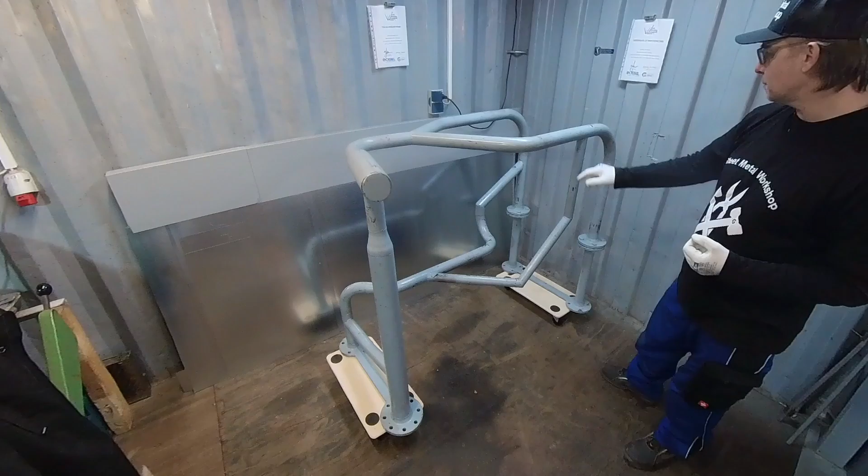Okay, first what I do when I come somewhere on the site is analyze what kind of job it is. So we have here pipe work, and I already see two boxes with different dimensions of pipes. It all depends on how much experience you have with measurements. I, for example, can immediately recognize the pipe - this is a 2-inch pipe, there's a 1.5-inch pipe, and here we have a bigger one, a 3-inch pipe. But if you don't have experience, there are tools you can carry with you, like this one.

If I want to know for a 3-inch pipe how much the outside diameter is, I just catch the diameter and read it - I see here, okay, it's almost 90 millimeters diameter outside. The same thing you can do. It's a good tool, you have to carry it with you. It all depends on the experience. That's one thing I recommend.

The other thing is, it's also not bad if there are a lot of angle pipes - this is a good tool for measurement to do with angles. So I have here this angle pipe, for example, and I can hold this exactly on the angle. See, now I can read here, and it says 45 degrees.

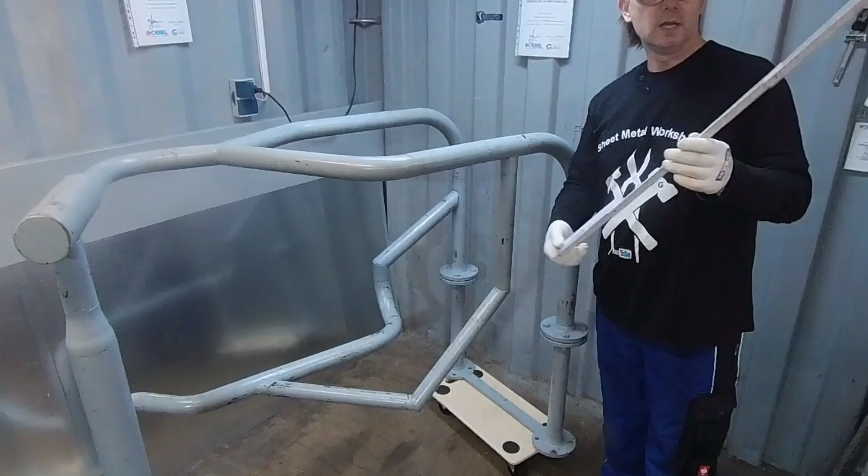Now there's also a helping tool. Of course, the more tools you use, the more you have to carry with you. It's not bad, you can put everything in a little bag and carry it with you. I use mostly, almost always, my ruler. So this is a ruler, and I can also measure the angle with my ruler.

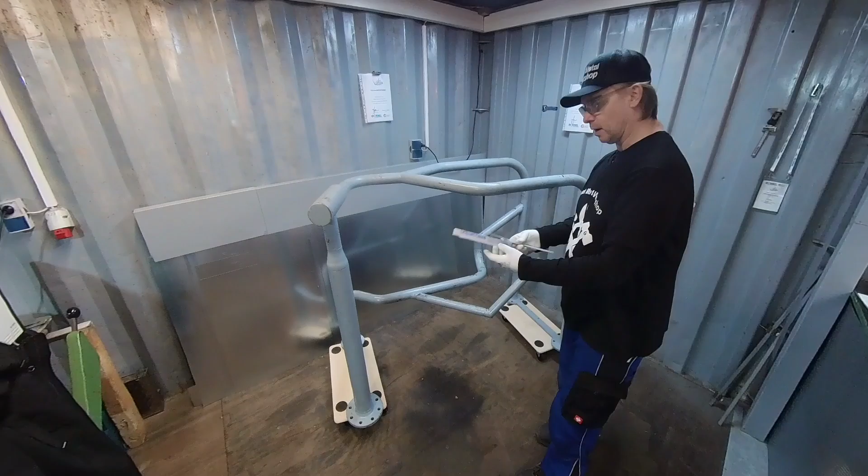Here I'm going to measure the same angle with my ruler, and I fold it, and it says here 766. Now I have a list, my ruler list - on one side I have my sizes from the ruler, and on the other side the degrees. So here we have 766, that means 45 degrees. What I do when I take measurements is always write down my ruler measurements, and later on look in the list to see how many degrees that angle is.

Okay, well, let's get started. So we are now analyzing this pipe rack. I can see we have 1, 2, 3, 4 pipes coming up, and then we have one pipe in between, and also down here one pipe in between. Now I'm not going to measure everything in detail - I mean, I will do it, but not on video, it would take too much time. I think the best way is I'm going to measure this part in detail to show how I will do it.

Maybe once I'm gonna measure it normal by hand and draw it on paper as a sketch, a normal isometric drawn by hand with my drawing template. The other version is the digital version, but we'll come back to that measurement later.

Okay, well, let's have a start. We start now measuring, and I hope you will enjoy the video. Of course, there are many measurement guys, everybody has their own experience, so there could be other versions of measurements - maybe someone's got something better or easier. I don't know, I'm going to do it the way I would do it, but everybody is welcome to put their meaning in the comments. Every comment is welcome. Okay, well, let's get started.

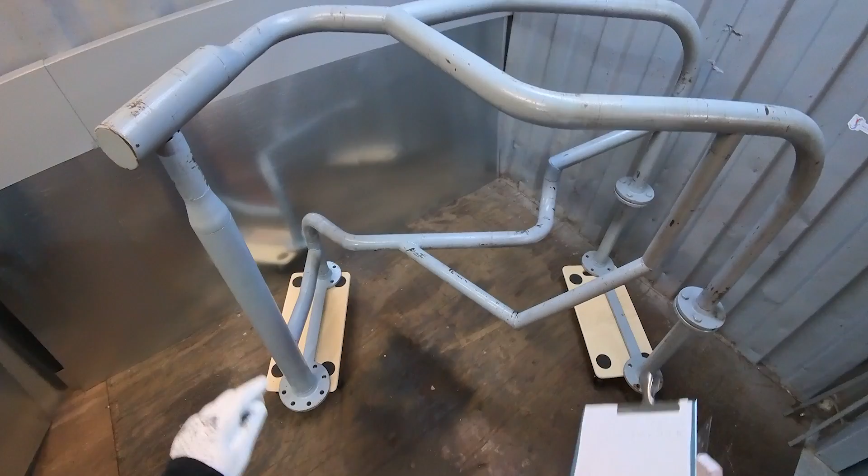Okay, now I'm standing here in front of the pipe rack, and this will actually be my view side - from this side is where I'm starting to measure it. It all depends on the situation on site. Maybe it's also possible I'm standing at the other side of the pipe rack and I measure it there - maybe I will see it differently. But in this situation, I'm going to measure it from this side.

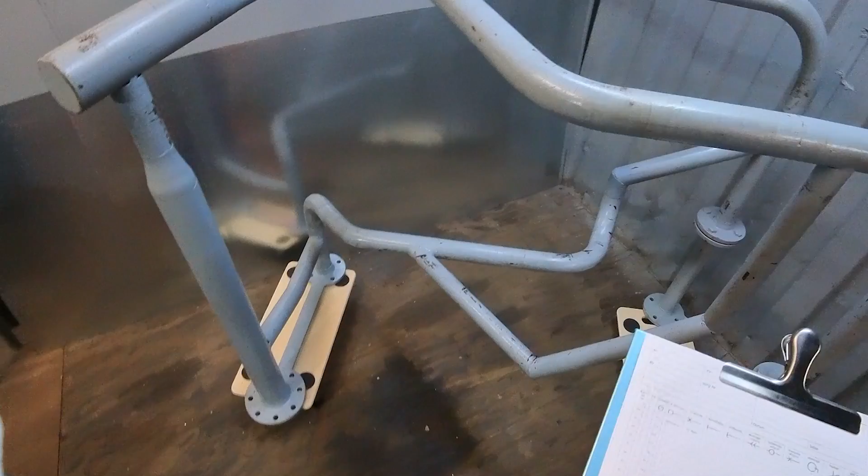So this is my front view, and it's always good when you put pipes with segments that you don't look into the swages, and if possible, also when we have this band, that we put the screws from this side if I'm looking at it.

So at the end, when the cladding is on it, you cannot see the seams or the screws.

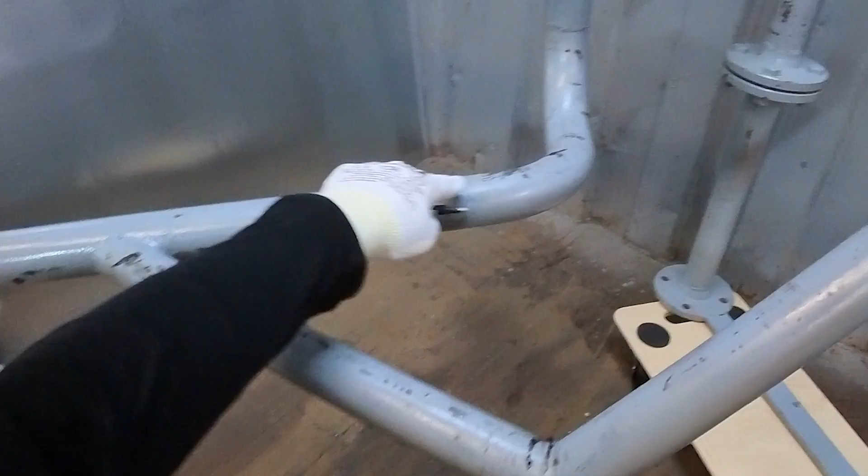Now next thing, I'm going to give those pipes position numbers. I've decided to make each position differently - I think it's easier. So when this is here, pipe number 1, for example, this would be number 2 position, here up until here. I will make this position number 3. Then we have this one, maybe position number 4. Then we've got that bend also until here, position number 5. And here this bend with the angle, position number 6. And then at the end, the Ypsilon T-pipe, I will make position number 7.

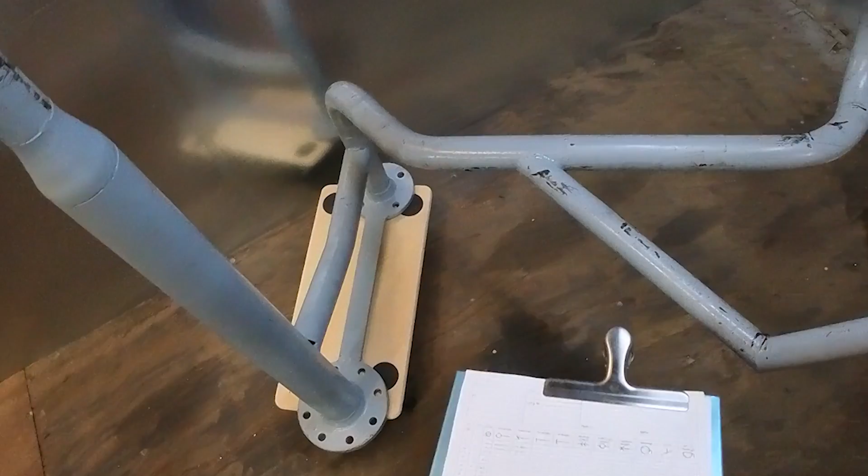But now for this example, I'm going to measure position number 1. Before I start, I know I'm going to write the pipe dimensions.

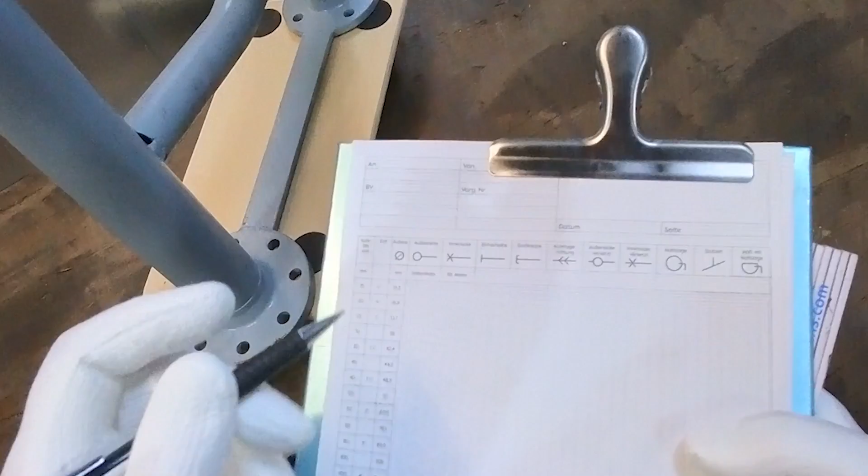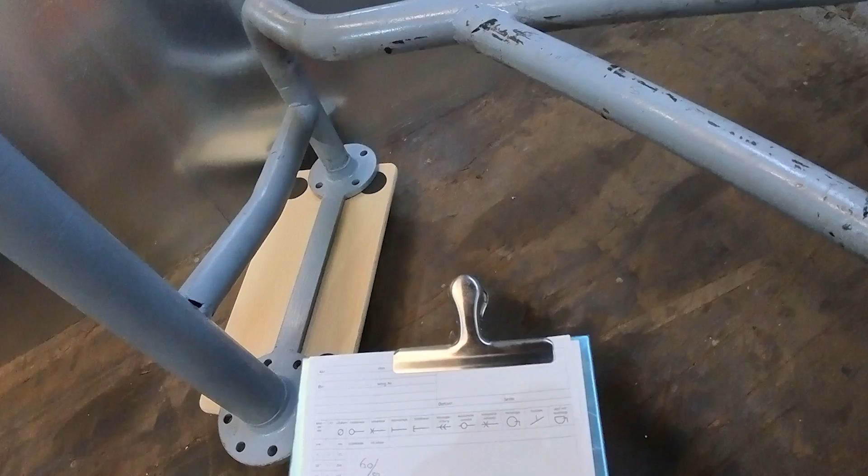So it's a 2-inch pipe, that means it's got an outside diameter of 60 millimeters, so I'm going to write here 60. And I know it's going to give 50 millimeter insulation, so that means 50 millimeter on this side and on the other side, that makes together 160 millimeter diameter. But from my experience, I think it's always better to make it a little bit bigger, so I give 10 millimeters more, so I'm going to make it diameter 170. That's the first information I write down.

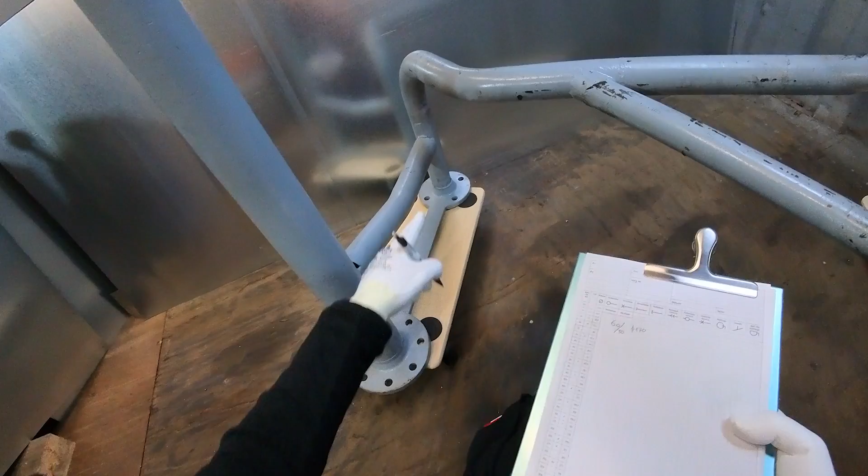Now next thing, I'm going to draw this pipe. So how it goes - it goes up, and I can already see it's a 90-degree bend. Then we have here also a bend that's got an angle, and then it goes straight, and here also a lying bend with an angle, and then we have a 90-degree bend, and we have here also an angled pipe with a T-pipe also angled with the same diameter. That is the stuff I analyzed.

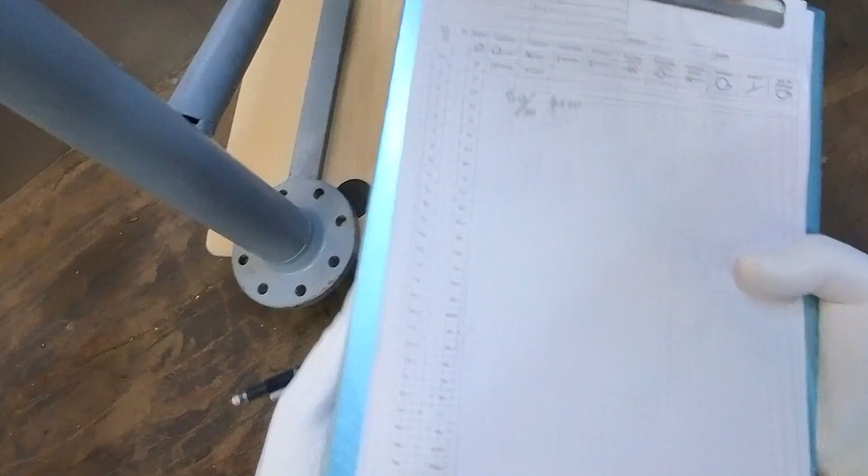So I'm going to start drawing. You can draw it directly with the drawing template I made a video about, or freehand. Mostly I do first freehand and later on I drag it over on an isometric or I put it digital. Okay, let's start.

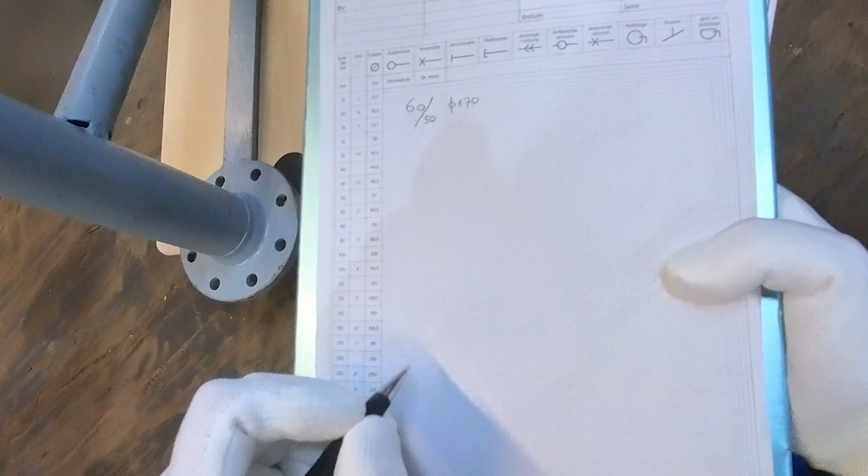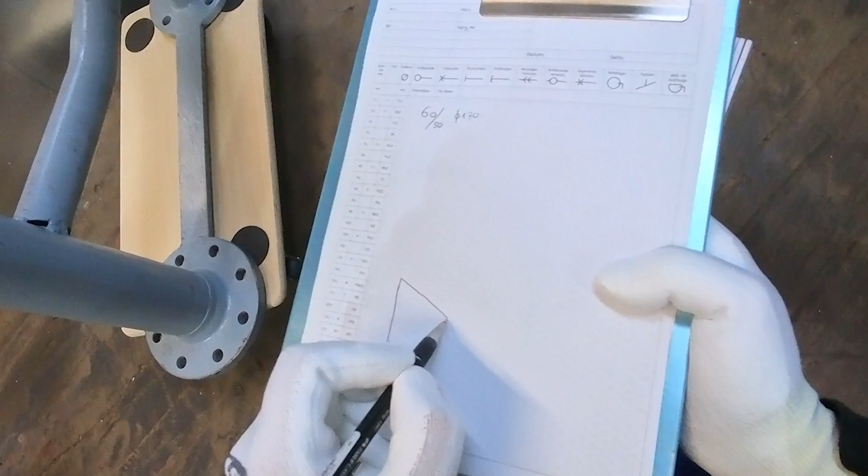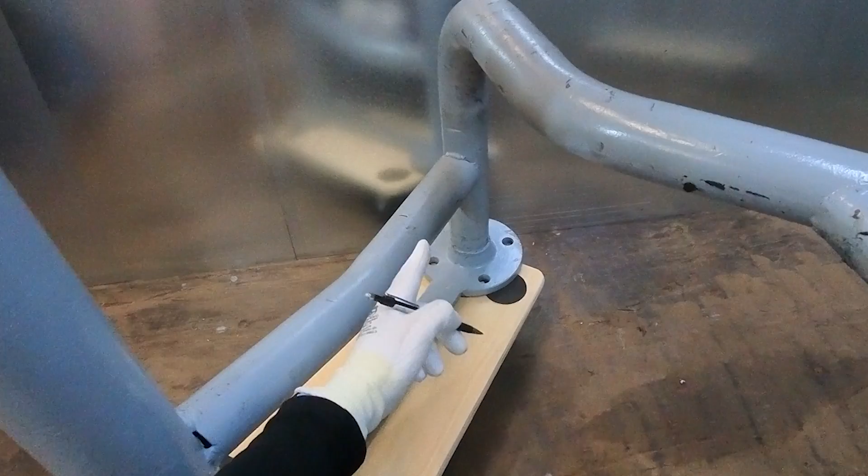So my pipe is now going here, goes up, and then it comes to the front, and then it goes to the side, and then again here, then it goes up, and then there's a T-pipe, and here it's another pipe, and this one goes a little bit like this. Here we also have got an angle. Here we do an end plate. Now we see here the T-pipe is coming in and the seam is also out of the center, and this one here also got an angle.

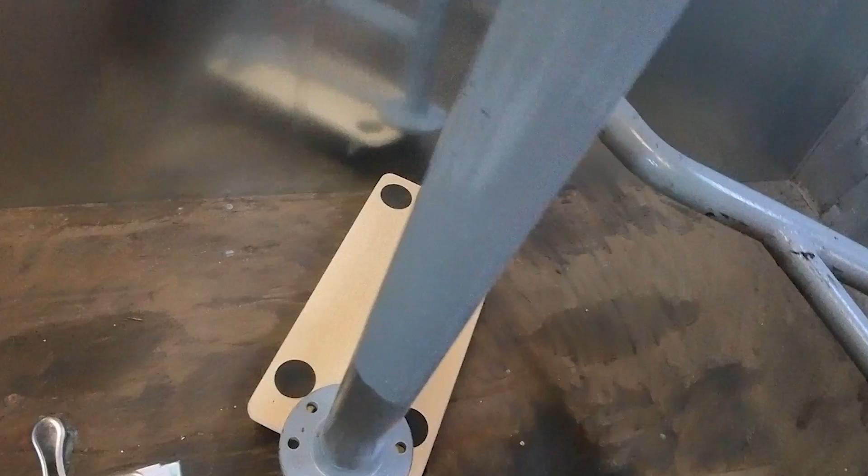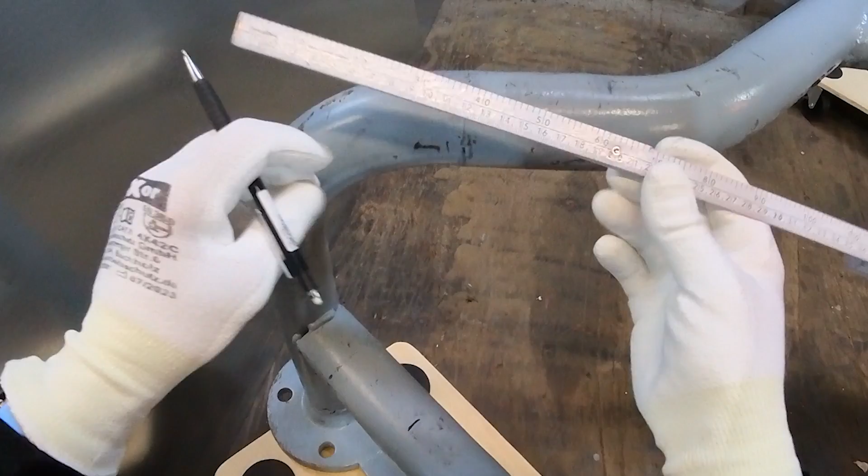So what we're going to do first, we're going to find out we need this length, and we need to know the radius. Here in this situation, you can see there's a seam, a welding seam. So if I hold my ruler on this welding seam and I go from this end to the center of the pipe - here's my center of the pipe - I will have here 130 millimeter. So my radius is 130. So I can give here R is 130.

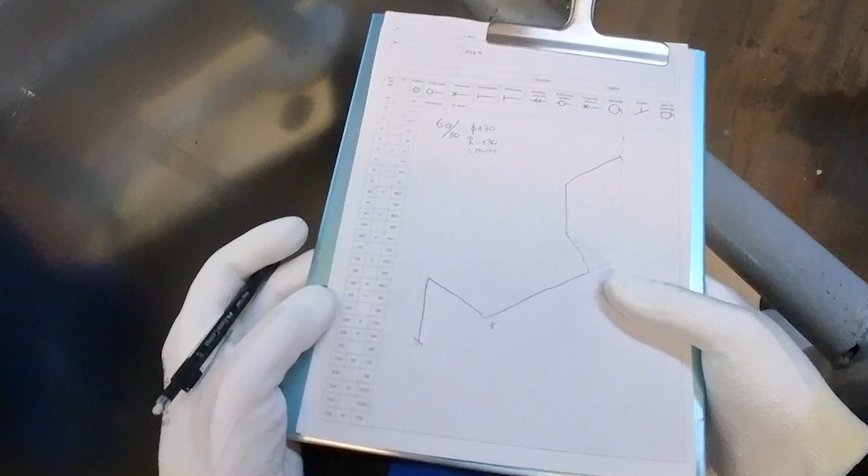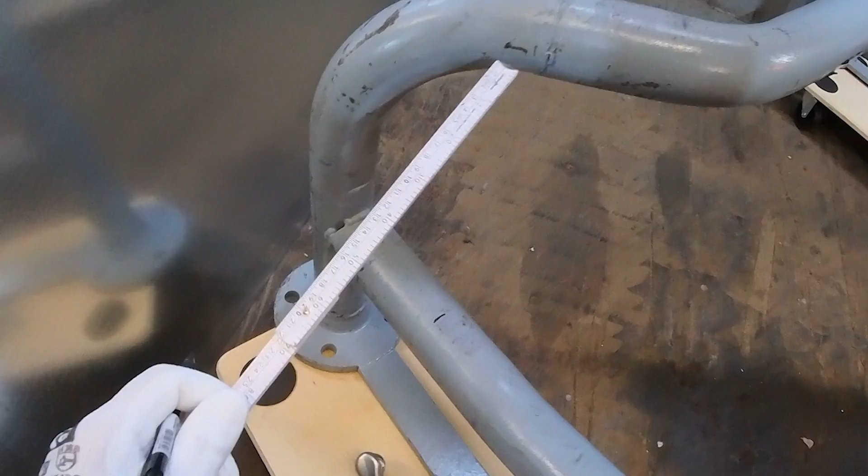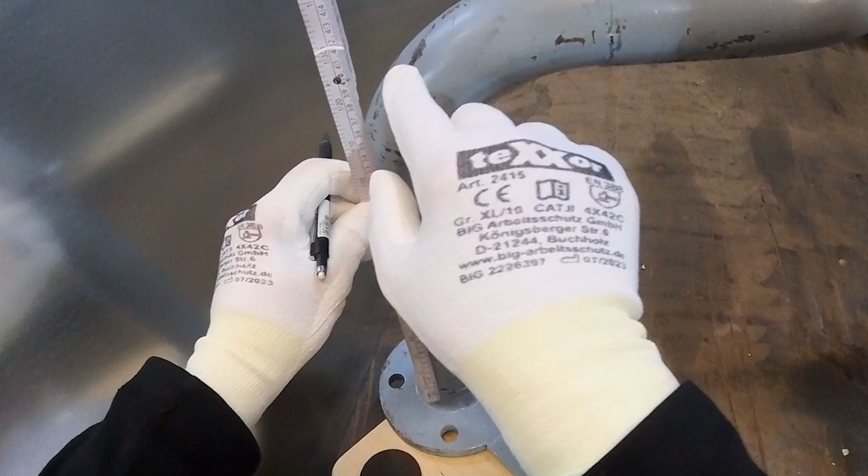And I'm going to give it a 3-segment bend, so 3 parts. So what I need now is this length, and I'm going to start here, give this length from here also down. There's a welding seam from here until the center of the pipe. So I'm going to hold my ruler here and look here - okay, here's the center. You have to imagine here a straight line. Sometimes you have to guess a little bit, but in this case, okay, 410. So that length is 410. I always measure from center till center.

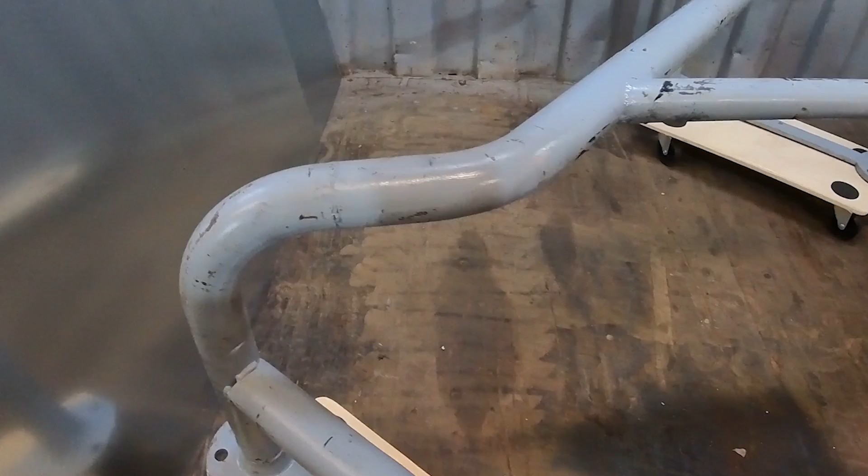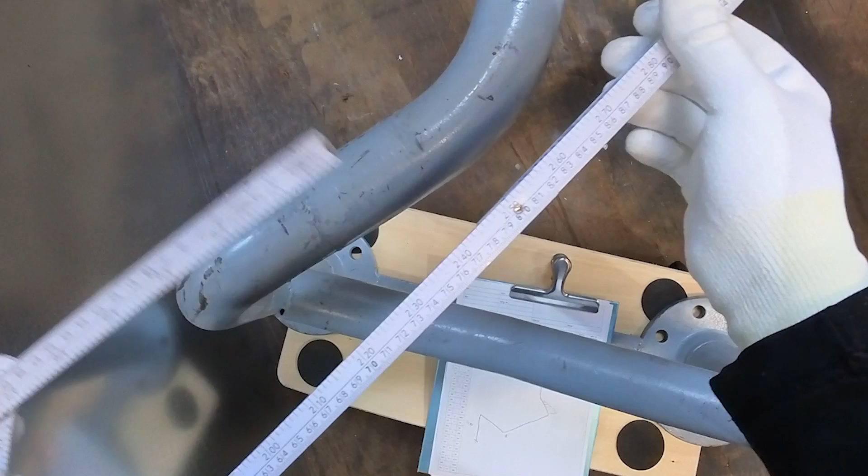Now I need the second length, from this center of the pipe until the center pipe of that angle here of the bend. So I'm going to put here my ruler and then look here. So I've put here my ruler, I have 769. Angle, 769. Okay.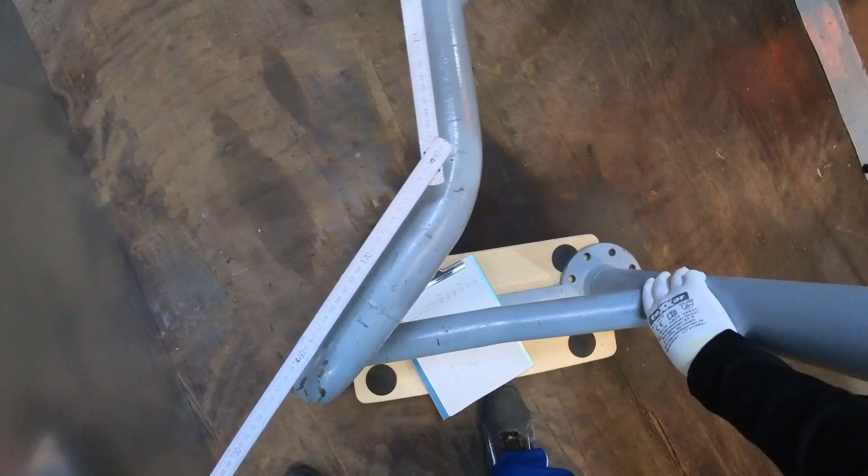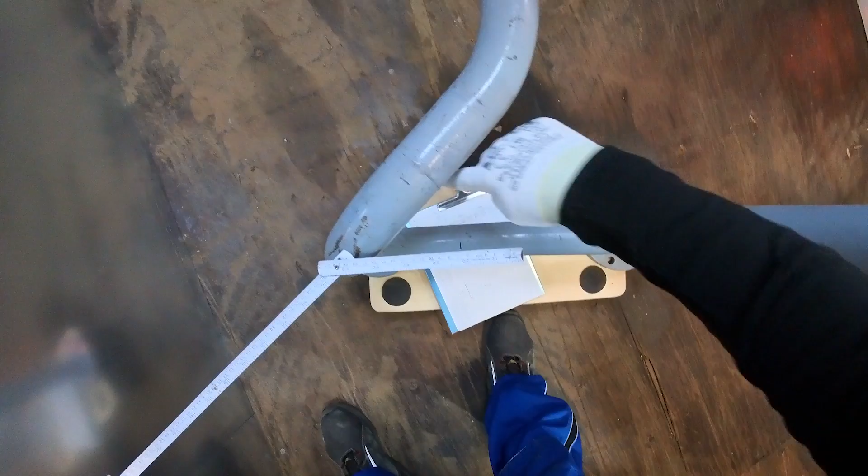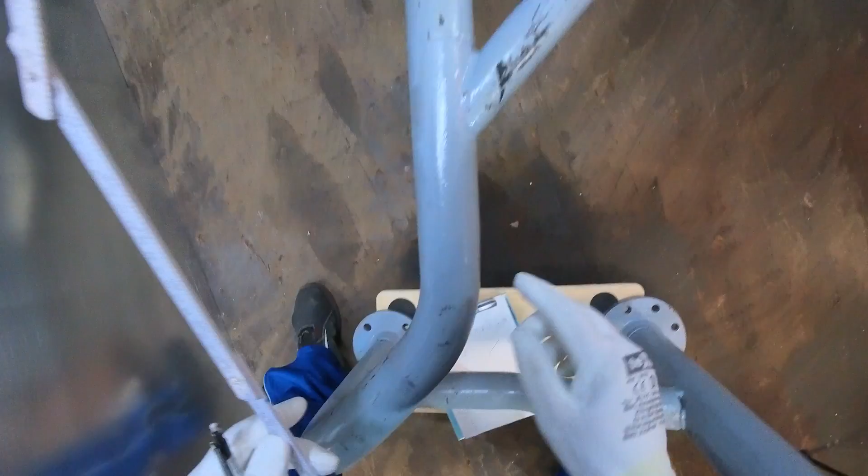Now here, for example, this angle - if you look here, this line from this line here, see, it's one line. So if I turn now this angle like this, and I go with this parallel line just here, okay, here, like this, it's still the one line, see? And if I look here, so it's symmetrical, that means this angle is also matched by this angle - it's the same angle. Okay, now while we're at the angle, you can also check here, and it looks pretty much like it's also the same angle, the same angle. Okay, it means - what I forgot - so if you put this here.

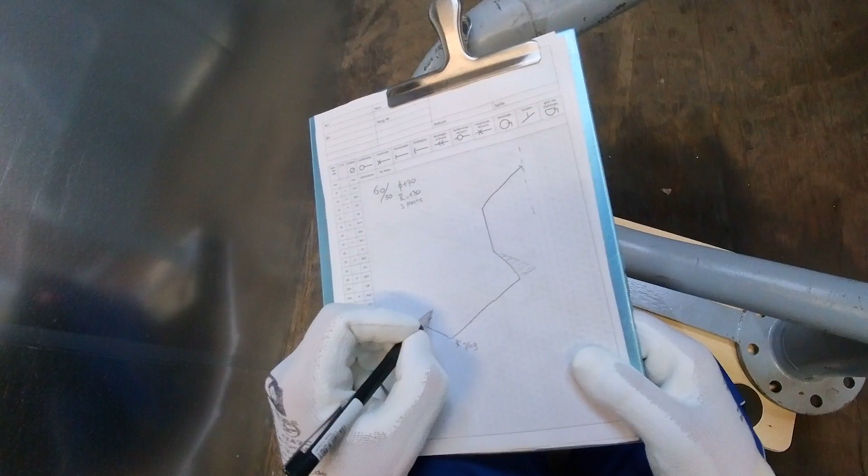This angle here, that means this point here, that's my center. So from this center point, I go to the center of this pipe here. Wait a minute. So I will say 260 millimeter. So that's 260. And I want to have here the seam, and here this seam is also 76.9.

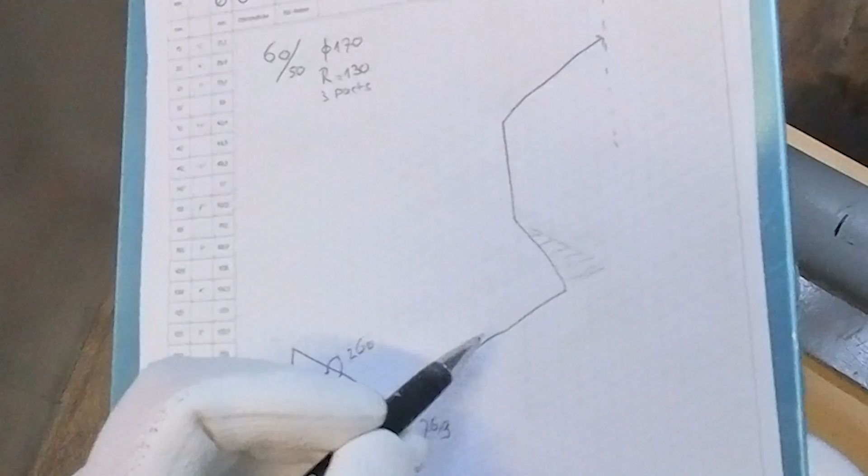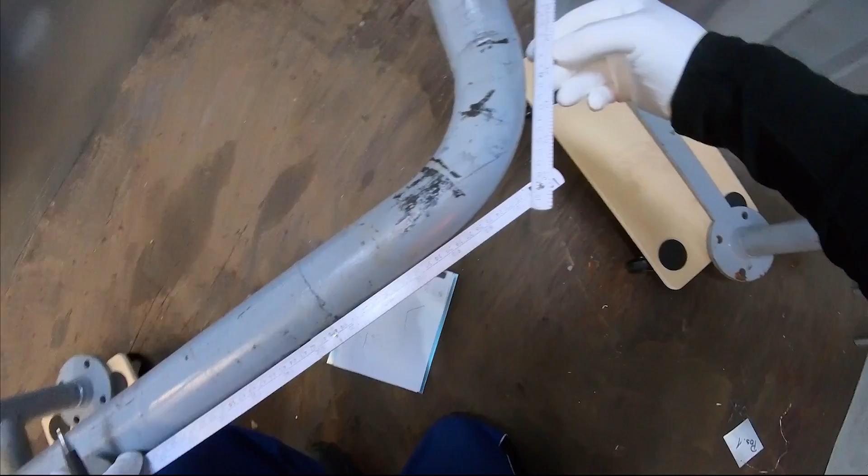Okay, then I have here the end piece, here piece. So I want to give here - we're going to measure it now. Therefore I need first this one, this angle. Can also measure it the same way. See, like this.

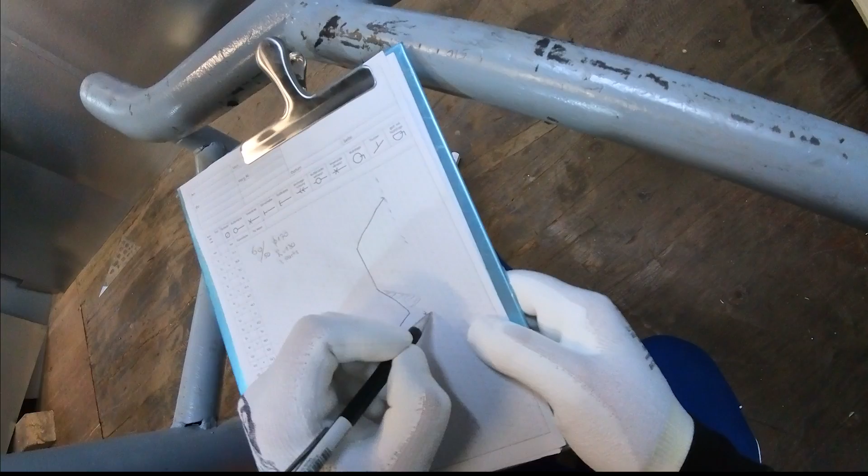And here I have also 76.9. So this angle is also known, 76.9.

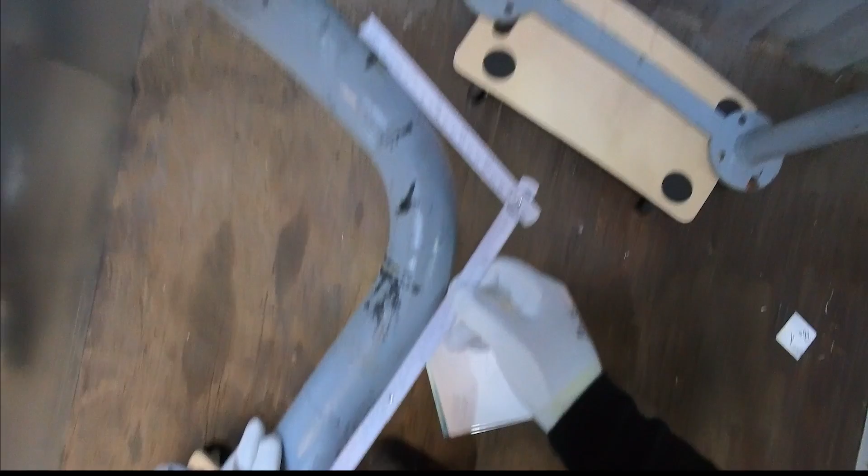And now same thing here. So I hold it again here. So this is here now my center line. So if I hold my pen here exactly in the center, it means here, that's my center point.

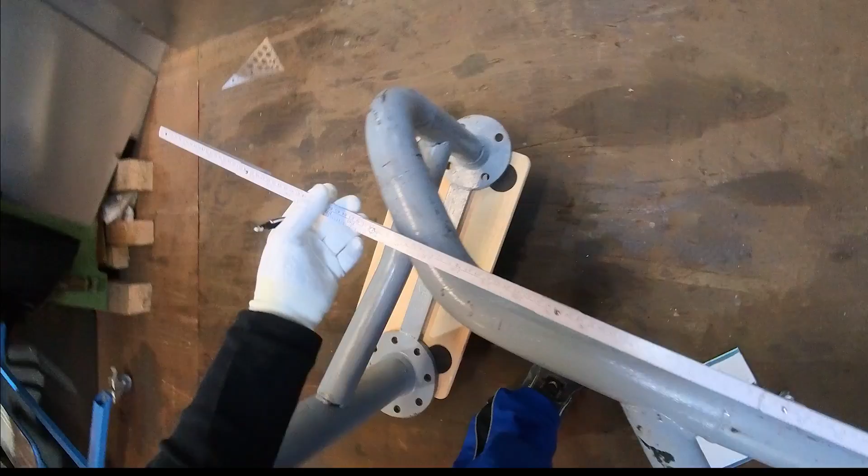And from that center point until this one, oh yeah, here we have 715 millimeter. 715. Okay, 715.

Now here's a T-pipe coming in, so it wouldn't be bad that I make here this bend until here, and then a piece of pipe here with the seam to the side, so it's easier maybe to fit. And then here the next piece starts with a bend.

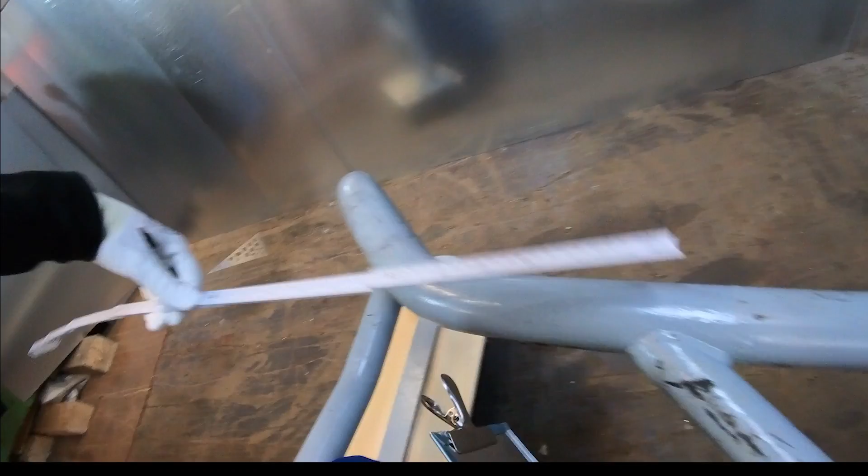So here I already did that before, so we have here a complete size from 715. And now we have from center here until center here, 230.

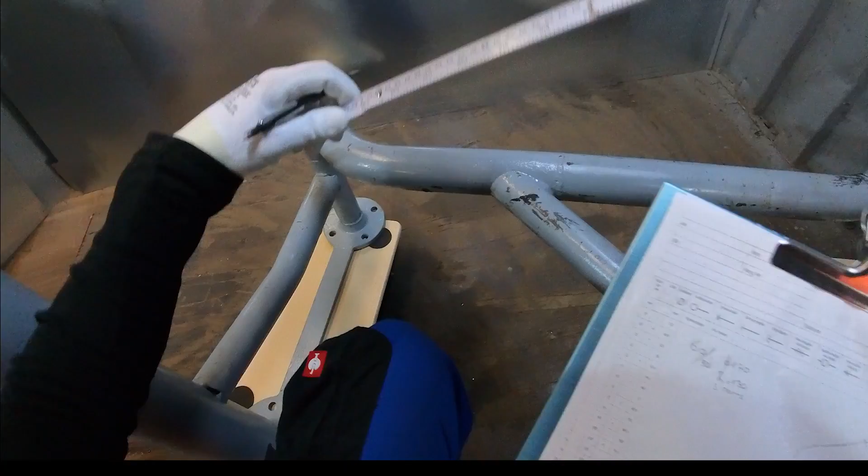So that's for the cutout, for example. 230, that's just, I notice, okay. So we give here, for example, 100. So here I have seam 100.

So 615 is left. 615 is left, so 100 plus, for example, we go here 500 until here. Okay, so I give here 400. And then automatically 500, so this is 215 left.

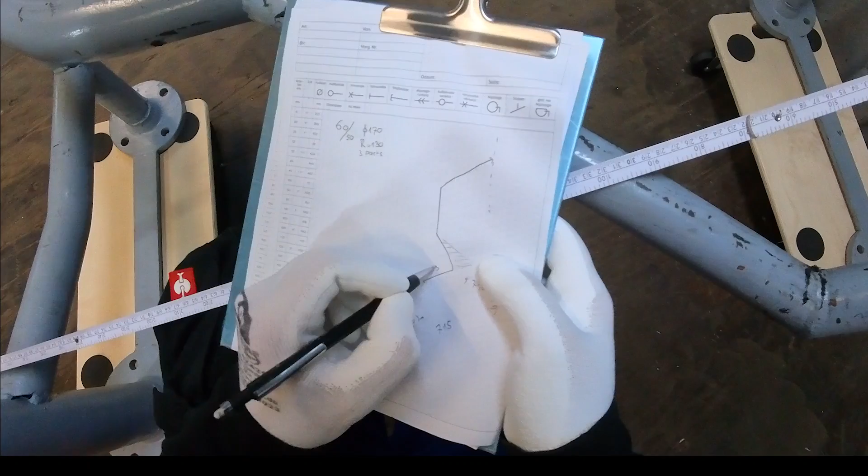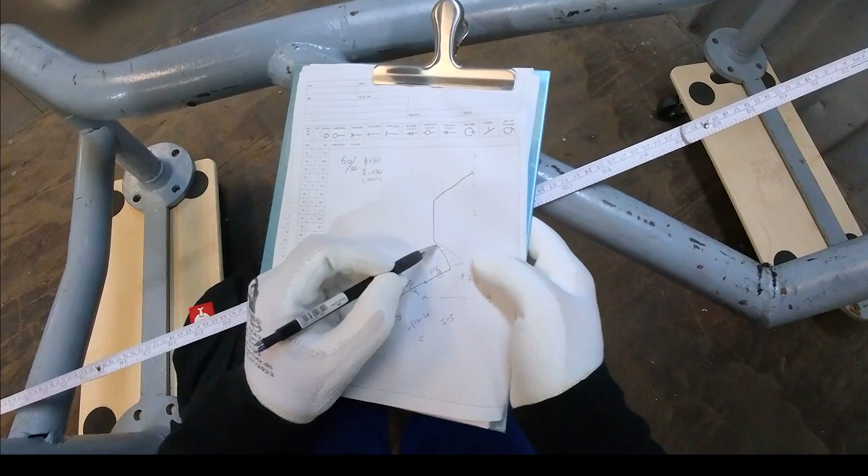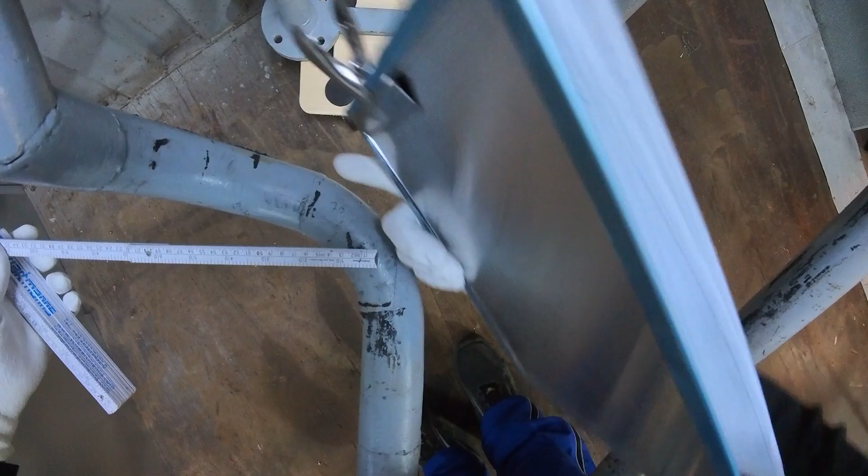Okay, well, here we have normally the seam on the side, and here is also coming a pipe. Here normal seam. Now I need here this distance. So we go here now, the angle, here's the center of my angle I marked before, and then we go

here until the center of the pipe, and that will be 200. So that's 200, and we need also this radius. We have here a welding seam.

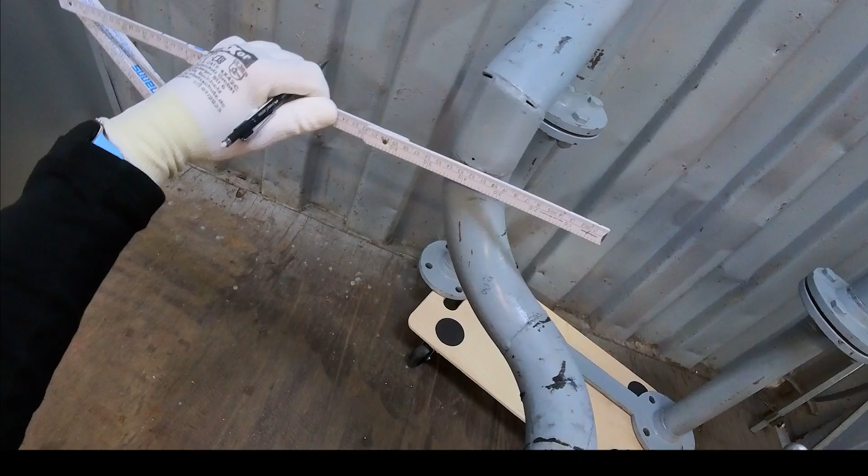So the other one was 130, so let's check if it is the same. 130. We have here also the seam of the welding, so 130 radius. So we give here also a seam, and this size is 130.

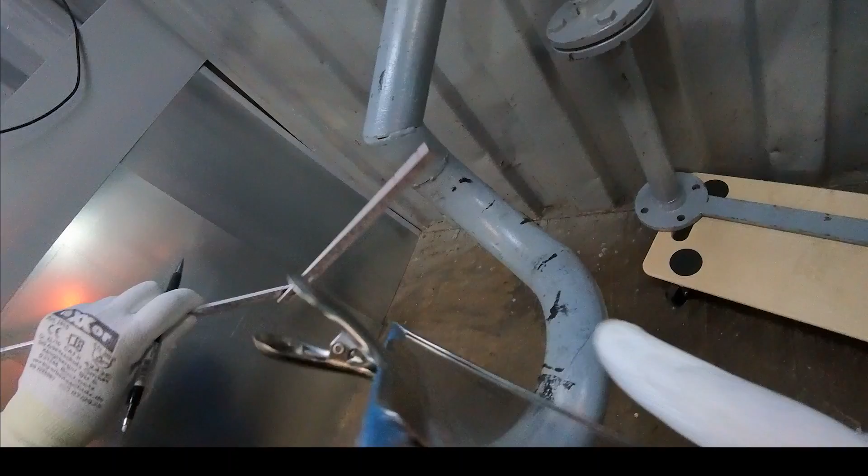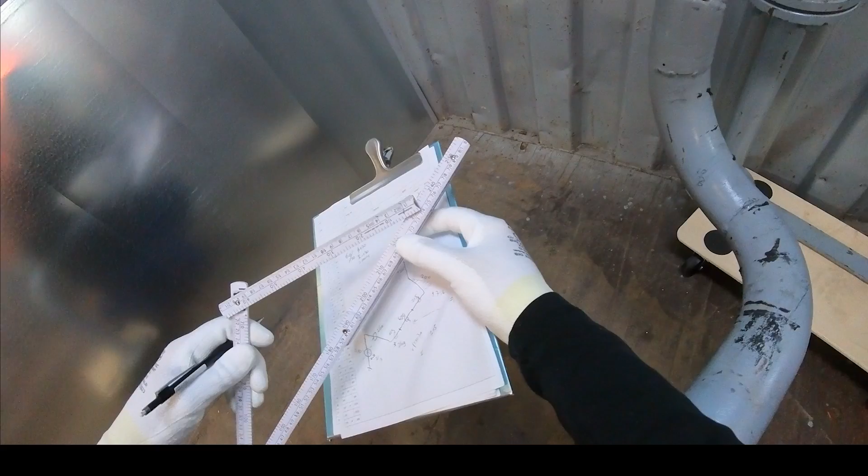We have here also got these angles on the ruler, so I can also show the other method.

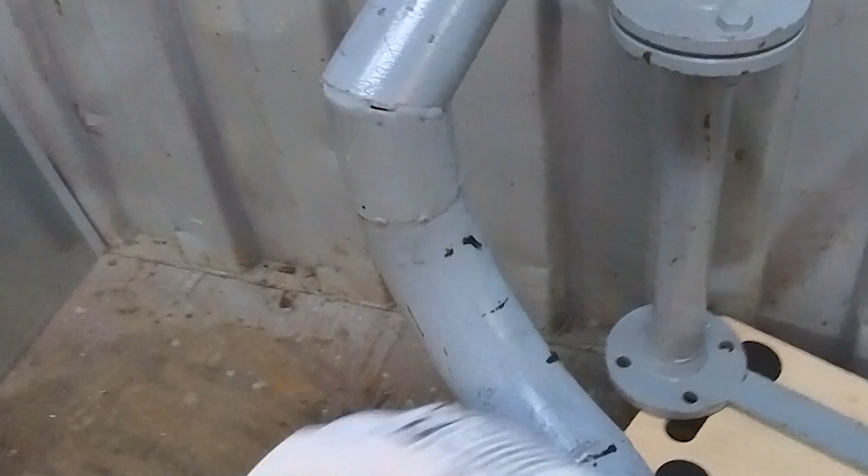Now we have here 120 degrees. Here 120 degrees. Okay, 120, 180 degrees minus 120, so this angle is 60 degrees. 60 degrees.

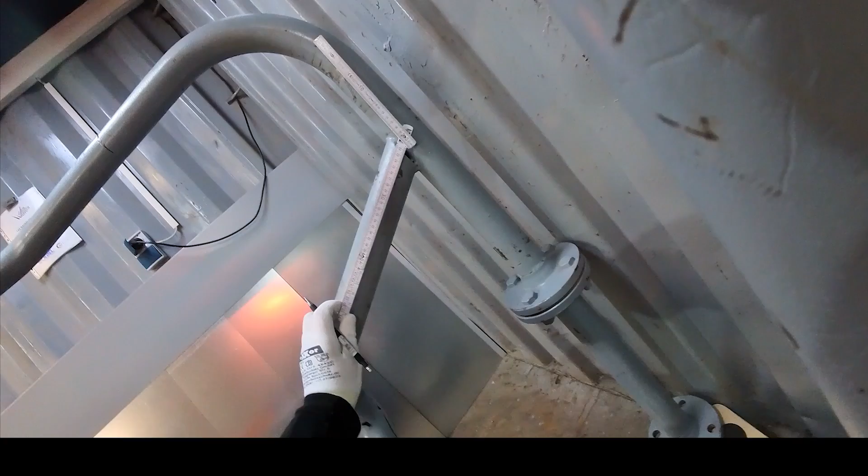And well, normally if this pipe goes parallel up and this one also, so this is still here, you see that this angle is still there. Now we check if it is the same one. Well, it looks like it is. So it's also the same angle, also 60 degrees.

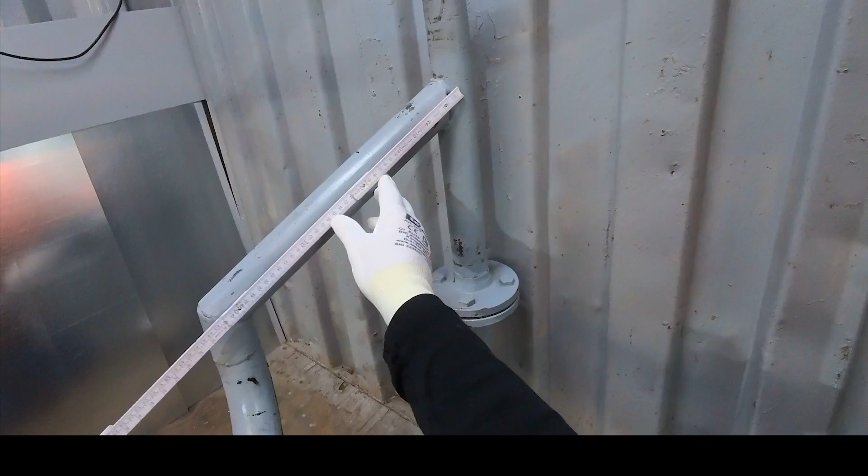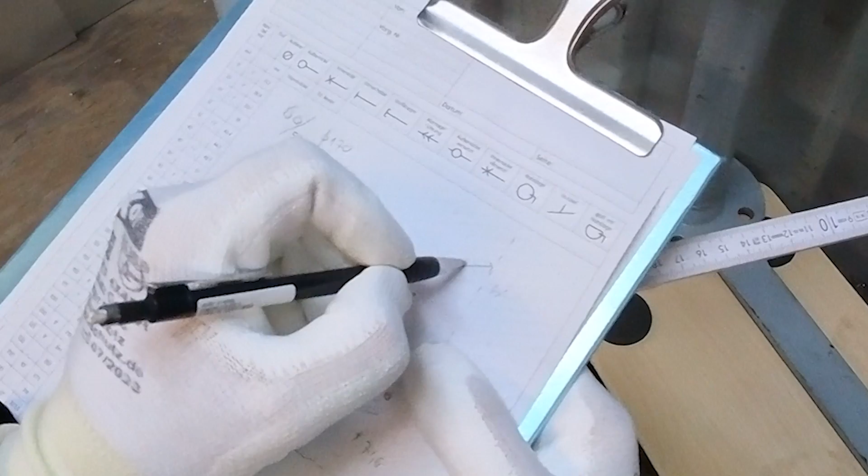Now, this pipe's got the same diameter, so diameter 170. And now we measure here from center pipe until center here where the seam is. We have 440. Now, I could make a seam here in the middle. Can also make it as one part, but I would like here to have a seam. And this one we're gonna make out of two parts, the T-piece, so 440, so I can split.

I give 220, 220. Well, that's it.

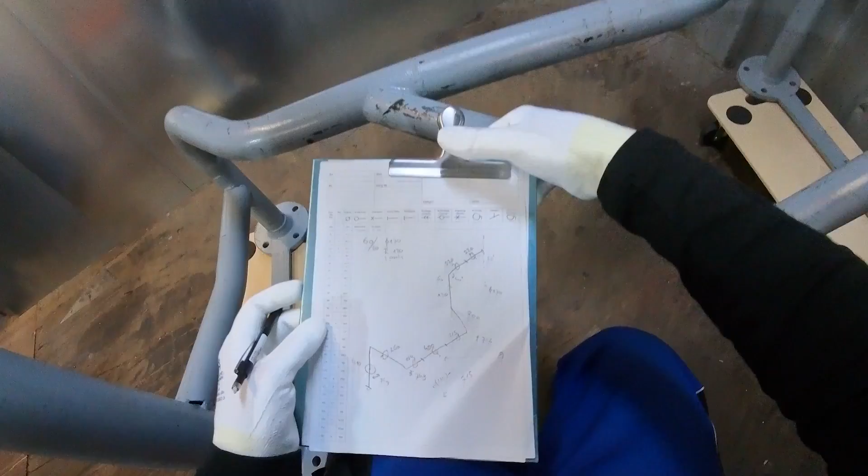That's now my isometric as a sketch. And if I now bring this over, so this was an example, if I bring this sketch now over and I want to draw it for the isometric, it would look like this. So this is the end result. So I have here also marked here the positions.

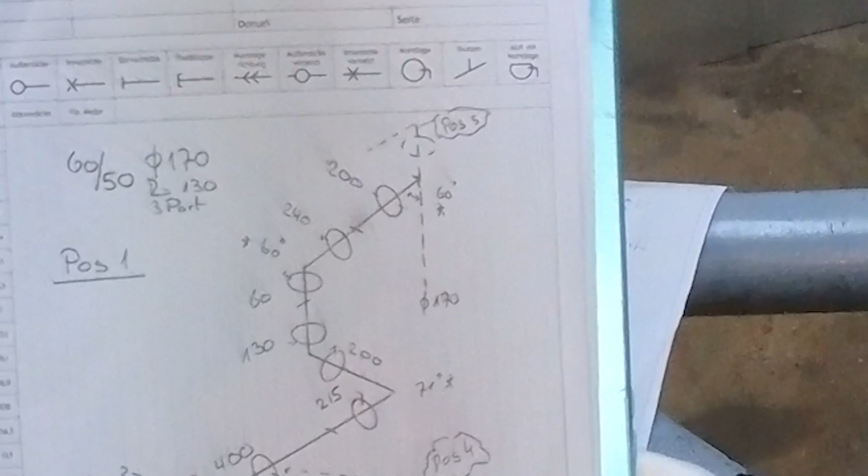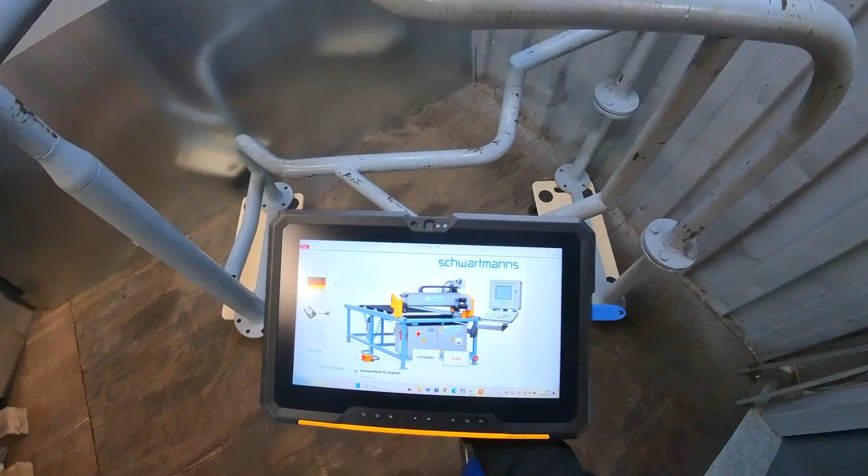And the next thing is how it looks when I bring this sketch over now in digital form. Now, okay, now I have here got my tablet with the ISO Connect software on it. That's the software from Schwartmanns. And this is now the way I'm going to show how to do it in digital form.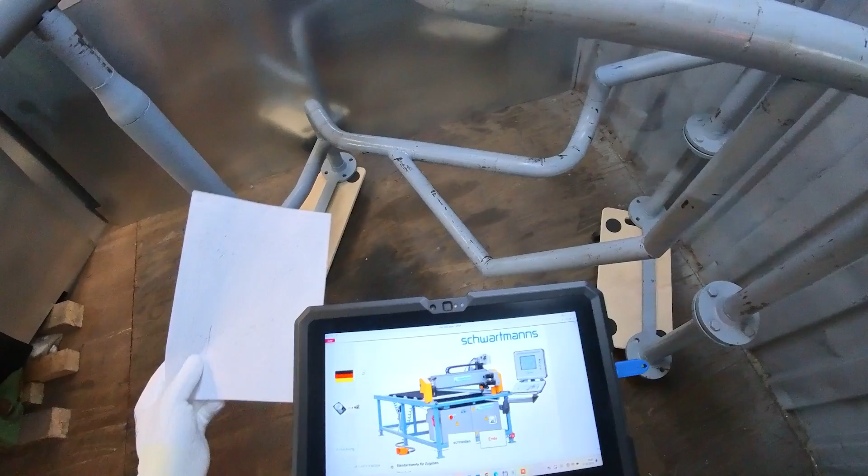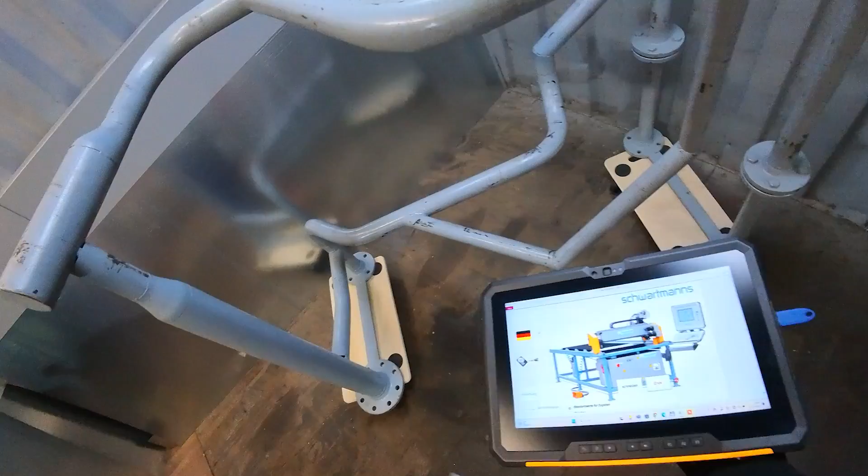So just, I'm gonna drag over these sizes on the computer. I have also a little bit of experience on sites, so when I measure and I have my tablet with me, well, it sometimes can be uncomfortable because you need both hands sometimes to measure, and then you put your tablet somewhere on the side. There's a possibility that it can be damaged, so you have to always be careful. So I mostly like to make a sketch and then drag it over directly in the computer, or I make an isometric of it.

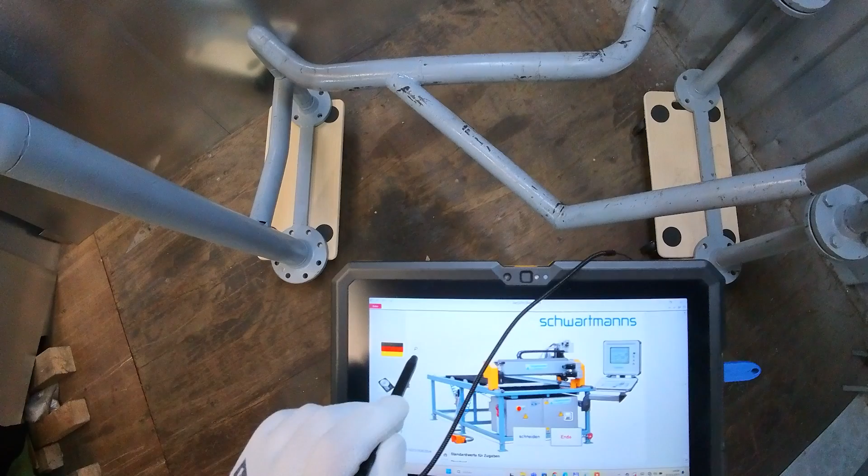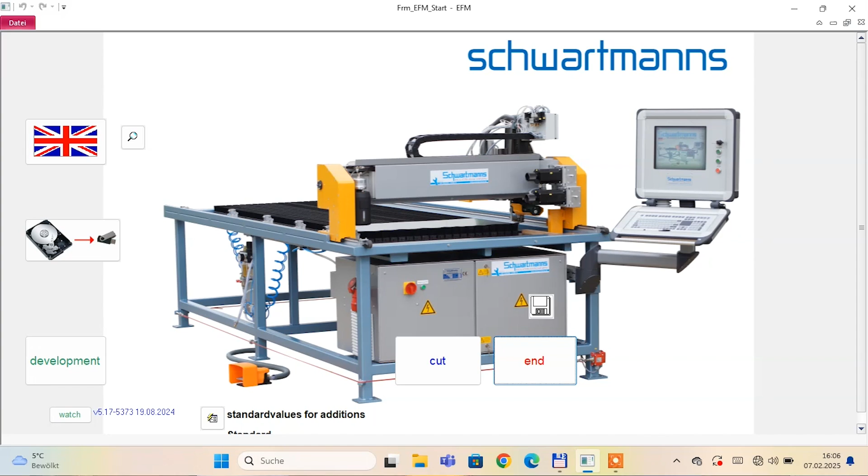This is the software. And here I can pick, for example, a different language. So there are many languages available, and I will pick, for example, here English. Okay, and we can here choose development or cut. So we go to the development.

And now I come automatically in the pipeline section to make. So I will give here my project, pipe rack for example, and here I can give the diameter, the insulation thickness, the bow radius, and the number of segments.

So I'm going to give the diameter I already know, so we said 170 millimeter diameter. I won't fill the insulation, I give here 130. It's also possible to give the naked diameter plus insulation, but because I give 1 centimeter more, I do it this way. And here we have also 3 segments. So these are now my basic sizes where I start.

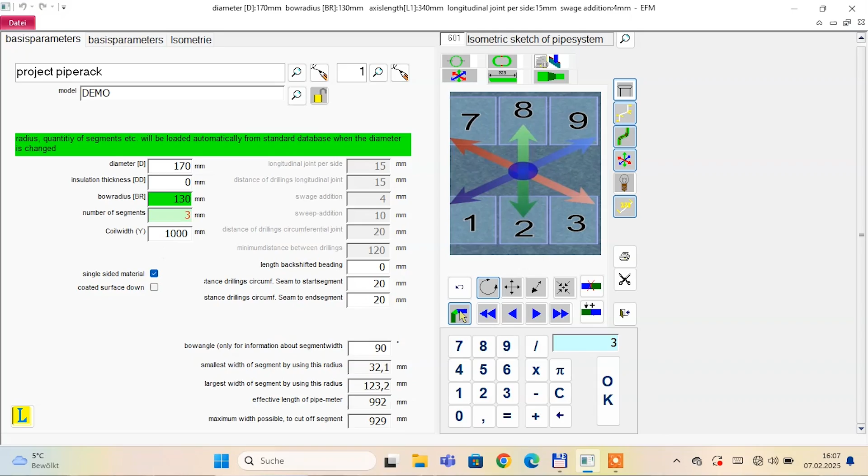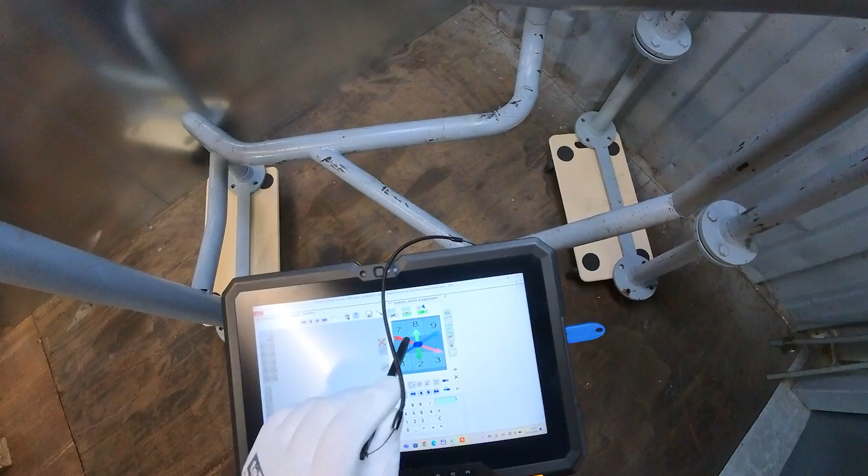My coil got a width of 1 meter. So now we go here in the isometric. I have here those arrows, and I can also turn it on or off, and then I use those numbers. For example, here where the pipe goes up, we press number 8, it goes up, and then it comes to the front, and then it goes to the side, and it goes one straight, next one here one to the side, goes up, and then in that direction.

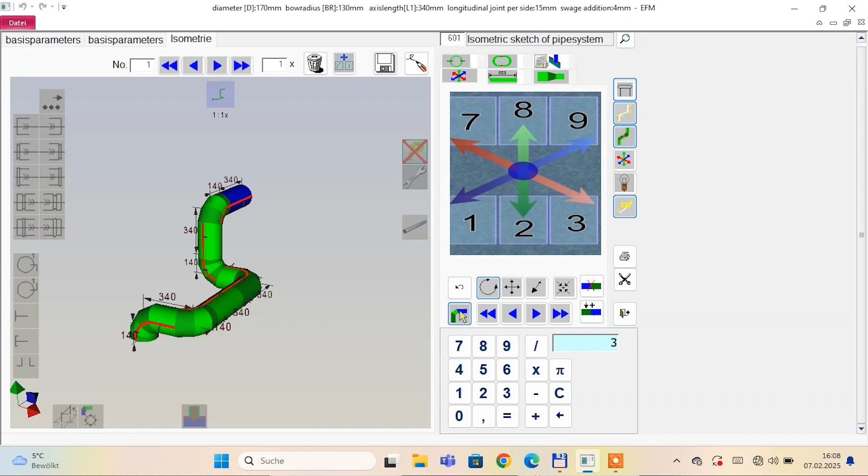So this would be now my first design. So next, what I'm going to do is come back here on the first segment. So I give here a length, we have measured 410, and we said here the in-between size was 260, and that bend had an angle, for my ruler when I drag it over in degrees, it has an angle of 42 degrees, but I want to make it out of 2 segments, so only 1 segment in it.

So now maybe it's better to see, and I want to have that length, we said 100. Okay, now this piece in between, we said we make it 400 long. We can here also change the seam.

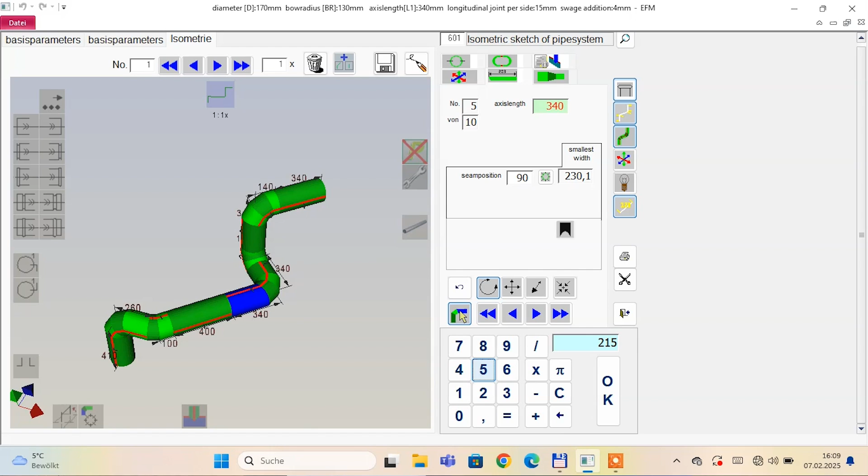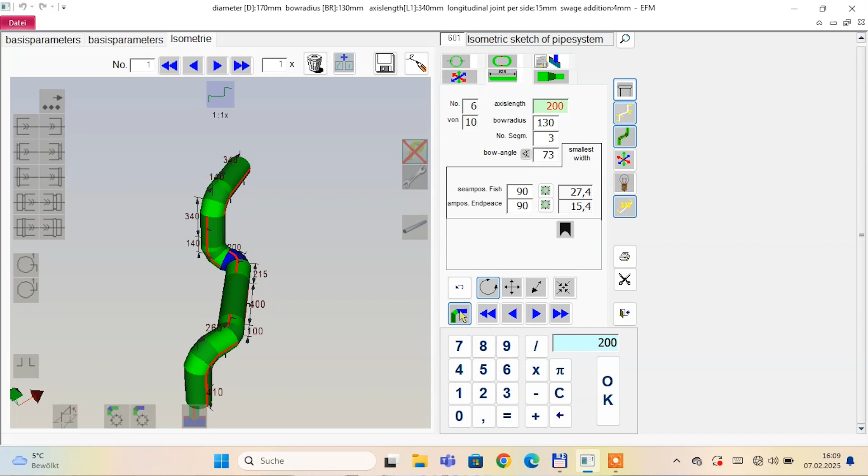Now this bend starting segment we gave 215, and it's got an angle of 73 degrees. And the size in between was 200, and then we got here this bend, we give it also a length of 130.

I'm going to make it also a little bit bigger, want to see it better here. Okay, now here this bend we're going to make also made out of 3 segments, so we have here a little bit more space, see? Okay, now the next size we took 60 millimeter, but we had an angle of 60 degrees with no segment in it.

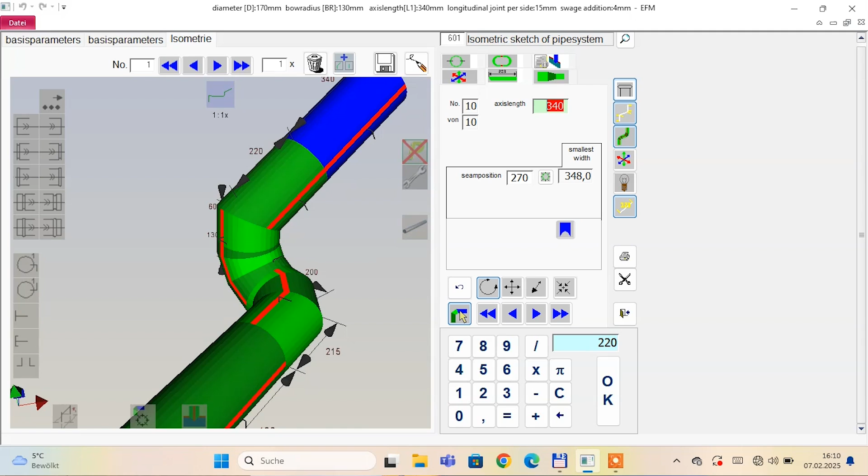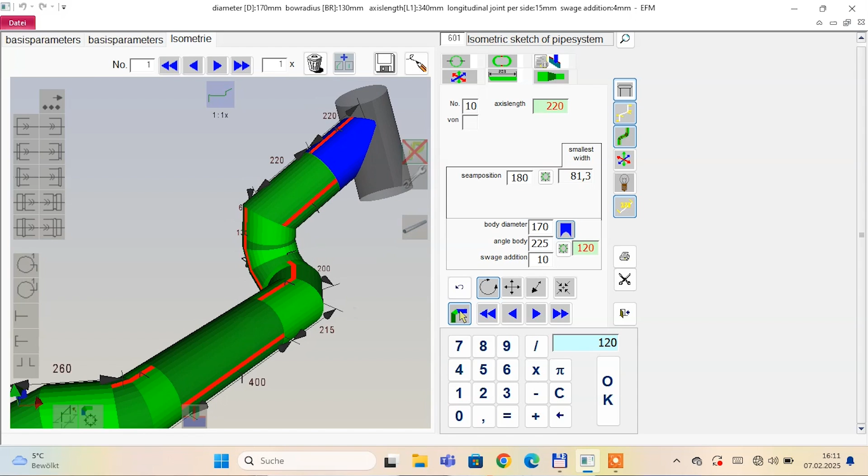And this one, so it's always the one in blue when I give the sizes. So here we said 220, and here also 220, and now right here we want there a T-pipe. This one is turning, yeah. Okay, and now here the angle 120. So that is it, make it a little bit smaller.

Okay. The only thing is here the seam here, and I wanted to have it out of 2 parts, so there's only 1 seam. So I have here an option to make it out of 2 parts, and here the seam is now there. So that is my starter part.

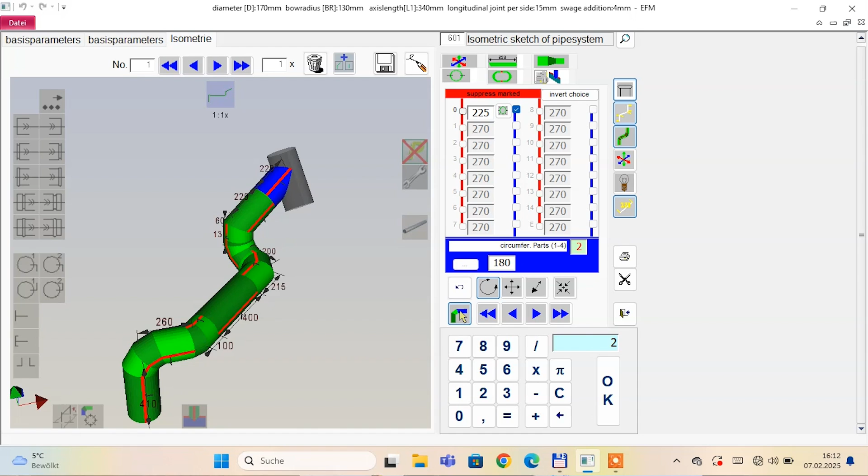What I wanted to show now, I memorize it, it's stored, and now I want to have, for example, go in the menu. There's a lot of different stuff here to choose, so I go now in the boxes, serial caps.

Okay, now we are here in the program for the boxes, and we have here some boxes, A, B, C, D. These are types of boxes, so I'm going to press once on A, and then we have down under those numbers 1, 2, 3, 4, 5, 6, 7, and these numbers are what kind of types. So 4, 5 and 6 are end plates, and number 7 if you have boxes with a flattening, and number 1 is 2-part, number 2 is 3 parts, and number 3 is made out of 4 parts.

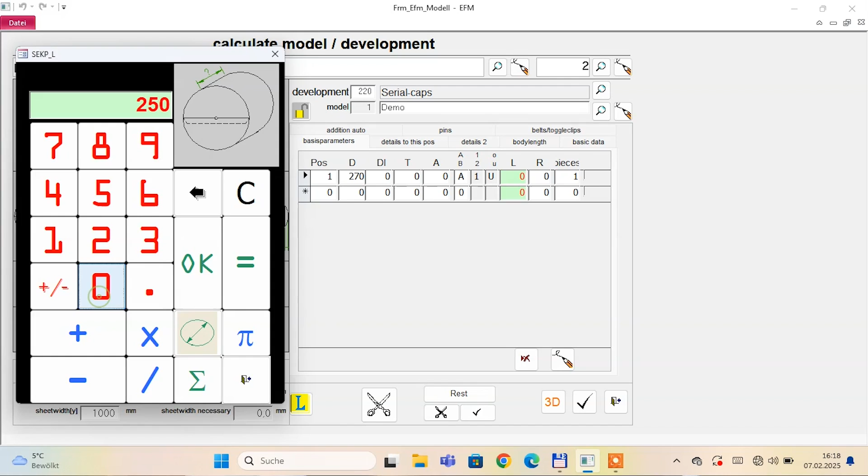So we're going to make a 1. So position 1, it's got a diameter of 270 millimeter, and it's long 250. So this would be now the 3D version.

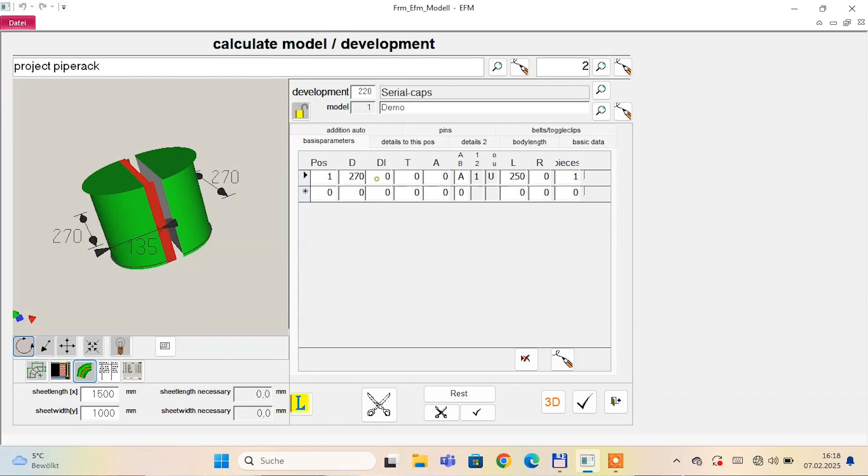And if I go back and I want to have it standing, so here there's an arrow, I press this one and I go now in 3D, so now you can see it will get a crimping edge. Now what I also can do, I can also make the cutout. So, and I need 2 boxes. Okay, well that's it. So these are the cut sizes.

So, and that's the procedure. So now it goes directly into the ultra cut. Okay, well, that was it, what I wanted to explain in this video a little bit. So for measuring, making a sketch on an isometric and dragging it over in the computer, so now the laser, ultra cut laser from Softmans can cut it, and that is the next step what I'm going to do.